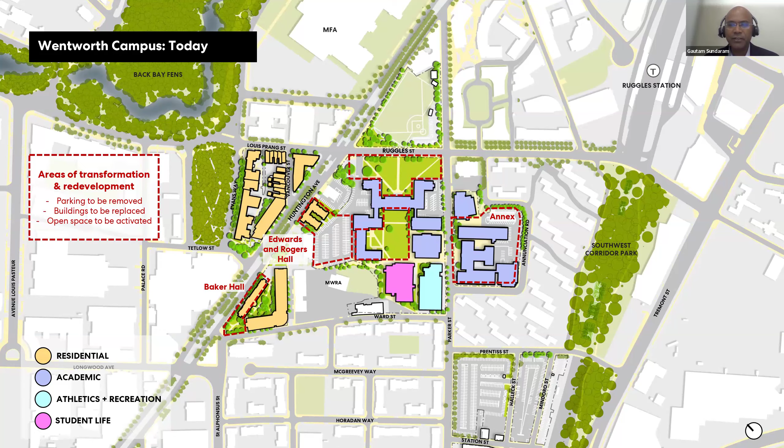But the key aspect of this plan has really been about that open space framework. It's about how do we really start to connect to what makes this place so unique, as we're organized by many of the neighborhoods that surround us, but also its amazing location.

How do we really connect that open space framework from the Fens to the Evansway Park and really make our open space framework part of that story and experience as it connects all the way out towards the Southwest Corridor. So really intentionally thinking about what those green spaces are, creating a diversity of those types of spaces.

What we're trying to highlight here is that this is not just about the student community or the Wentworth community. This is about the much broader community, engaging them and creating a series of diverse types of scaled spaces, but also diverse ways we program some of these spaces.

Some are passive recreation, some are larger gathering spaces, to a more park-like space, to a smaller social space, to a community garden scale space as well. So really thinking about the broader experience coming from the Fens all the way through our campus has been a key part of how we think about the scales and types of spaces and making that interconnected.

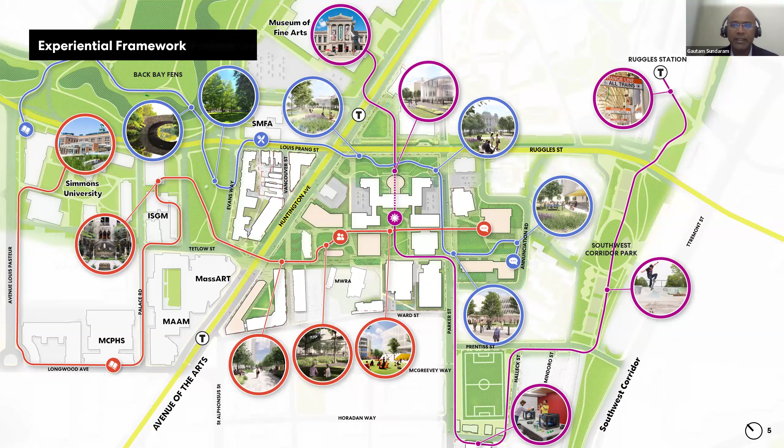Similarly, then you overlay that with a circulation pattern. And that circulation pattern is one that's really about not just creating direct connections, but a fluidity in experiences as well, creating those smaller moments of pause, whether you're in an indoor space or an outdoor space.

So how do you start to really create that circulation pattern that connects to the broader context and let that open space framework and circulation pattern drive, by putting the landscape in the forefront, what this overall master plan wants to be.

And so that has led us to the overall master plan. In the principles, it has been very consistent with what we shared with you before, but with a lot of differences in how the overall ground plane has evolved, with a significant open space called the Commons in the front with a new pavilion.

By relocating what was previously discussed as the pavilion, at the corner of Ruggles and Huntington, it's now going to be a gateway and a welcome center to the Wentworth campus itself.

And then starting to really create a series of open spaces, from the Fens, the Evansway Park, to the Triangle Park, and then creating new smaller spaces like the Grove, which are now framed by a new residential building on either side and an academic building. Then really reimagining the quad itself as the heart of that campus, and connecting all the way across Parker Street into what could be a new green space with a series of other garden spaces now transformed by the redevelopment of the annex site as well.

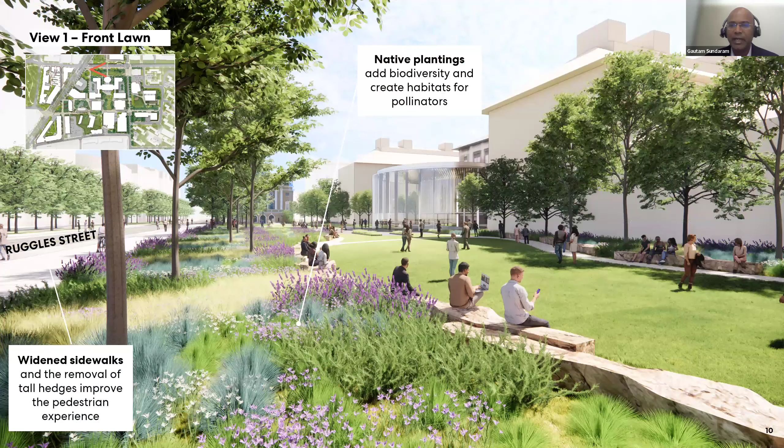When we look at the experience today, it's a very civic lawn that is much more of a visual element, separated by an overgrown hedge with narrow walkways and direct pathways leading to Wentworth Hall itself. We're transforming that to be much more of a park for the community and the neighborhood, unlike what we have today - a park that celebrates and brings in a lot more ecological biodiversity.

It creates a buffer between what is a vehicular street along Ruggles and what would be a programmable space, whether during the daytime and weekdays, or during nights and weekends, where it could be programmed for many uses for the community as well. Widening sidewalks with the removal of many of those hedges really completely transforms this into a much more usable and programmable park, one that promotes urban biodiversity.

As we continue to walk closer towards Wentworth Hall, one of the key challenges has been the inaccessibility of the building itself. So we're taking an impediment and transforming it by creating a new gateway to the campus, a place that really becomes a visitor center, a welcome center that opens up the campus and starts to make it a place of science on display, celebrating the great work that many of our students do.

By making it accessible, it starts to become this gallery space that celebrates the work our students do, but also is a great way to showcase and bring our visitors and community through this journey of classrooms, open spaces, and gallery spaces - bringing you from that front lawn all the way through accessible walkways into the heart of the campus, which is the quad.

So that's the quad as it stands today. That's Beatty Hall, an existing building. And then here are the lower one-to-two story buildings I was talking about before.

A key focus has been, while this is a great lawn that everybody appreciates, to transform the way we think about the edges and defining that. A new academic building, very similar in character to this existing CEIS building to my left, will have maker spaces at the ground floor with student co-working spaces, lounge spaces, and other meeting spaces at the upper level, with a cascading set of stairs as a way to define and activate the edges and activate our overall quad as well.

As you move through the Grove and look at the next very important threshold - if you're coming from the Fens or the Evansway Park and crossing Huntington Avenue, this is your current view right now. We're transforming that to be much more pedestrian-friendly, with a wider amenity zone lined with trees and lights, and a wider sidewalk.

Getting rid of the piers and the fences and opening up those green spaces really creates one comprehensive green space that could be programmed and serve many different types of activities, and also becomes a much more vibrant addition along Huntington Avenue as a civic space.

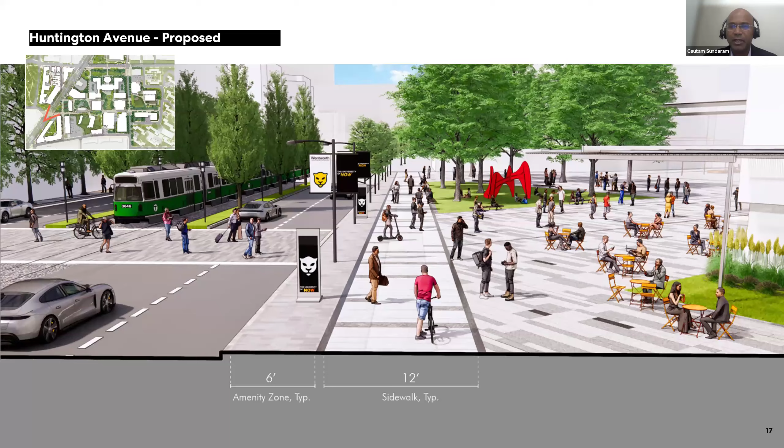As I make my way through what's currently known as the Treehouse building, walking what has also been called the Pike, you can see that narrow sidewalk beyond - that's the current view. We want to transform that by making it a much wider sidewalk, lined with planting on either side, completely opening up this connection in the east-west direction, a very strong pedestrian connection.

This really brings us all the way through into the core of the campus, but then also allows you to walk all the way out to the southwest corridor as well.

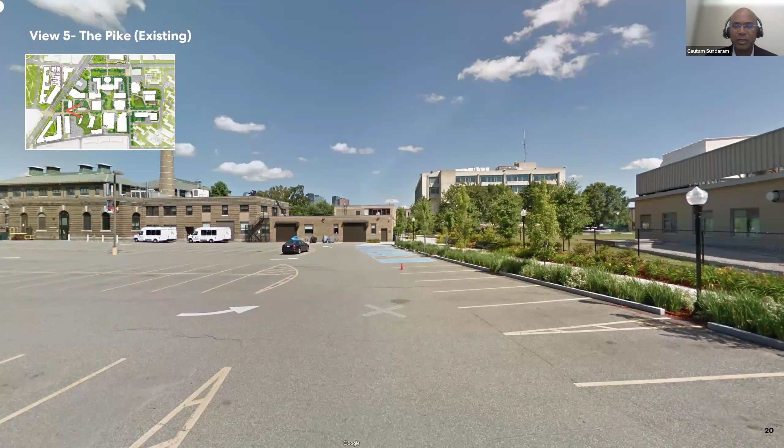A parking lot, currently called West Hall, is the major primary use here. You can see that narrow walkway separated between the parking lot and the MWRA site is now transformed into this wide pedestrian promenade, shaped and spatially defined by this residential building, creating a new green space where the parking lot exists right now, which we've called the Grove.

This allows us to have a lot of active uses at the ground floor, but also allows that fluidity of circulation with mural walls screening the MWRA site, creating covered and semi-covered spaces as well.

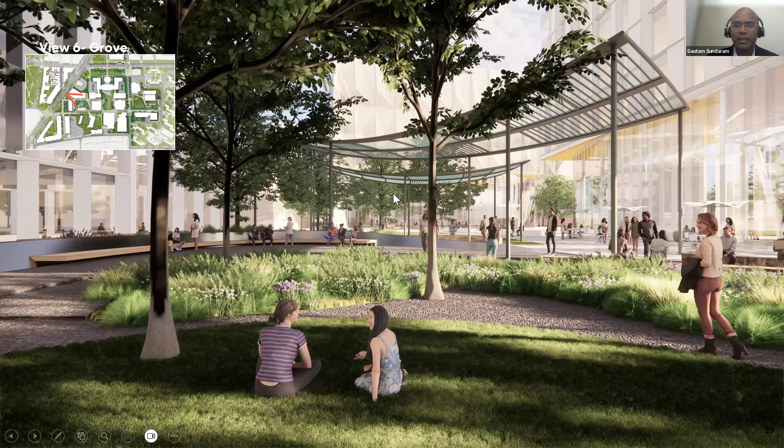The parking lot itself is now transformed into a new green space, which we've called the Grove, framed by many of these residential buildings with active ground floor uses, and also the academic building.

Not only a space for the Wentworth community during the daytime, but more of a passive space for social and smaller group gatherings under a canopy of trees, creating a shaded environment. At nighttime it becomes a space for the community as pedestrians come in off Huntington Avenue, engaging with this vibrant, sculptural space that brings art and other elements for programming during the weekends.

This also allows us to continue this strong pedestrian connection, making its way through these green spaces towards the southwest corridor. And finally, in conclusion, this is the view looking back from the Annunciation Road.

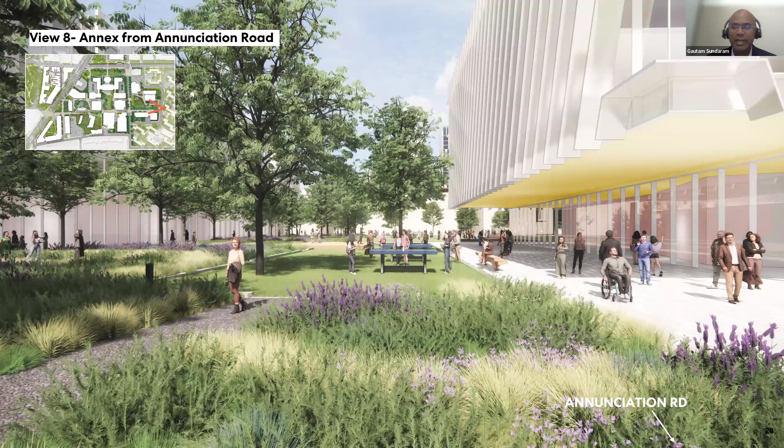From Alice Taylor Housing, a lot of what we see is the backs of building services and sidewalks. What we have heard from community members is transforming that view into something that's no longer the back of a building, but a new garden space framed by active buildings on both sides.

A garden space that could be programmed for seating and other ways the community could use it, while also continuing to be part of a larger framework.

This is an existing aerial view looking back from the Alice Taylor housing side, which now gets transformed into a series of open spaces that make a connection all the way from the Fens towards the southwest corridor.

The pike is now transformed not just as a singular idea of a walkway, but into an idea of multiple open spaces of diverse scale.

Really starting to change the way we think about land uses, no longer organizing them by primary uses, but really activating the ground floor as much as possible.

Here's showing you how we have more student life and active spaces at the ground floors of many of these buildings, highlighting the new pavilion, which is a major visitor center and a gateway into the campus.

Ultimately showing this in the overall massing as well. One key aspect highlighted about the height of the residential building is that we're meeting the Avenue of the Arts guidelines, and there's no longer a shadow cast at the Emerald Necklace for any moment of time in the entire year. So we've taken down the height of the residential tower.

This aerial view starts to show the overall composition of open spaces. Finally, I want to close on the impact of what we believe this master plan really reinforces: the legacy of the city of Boston, and how it could be a great addition in connecting the overall Emerald Necklace.

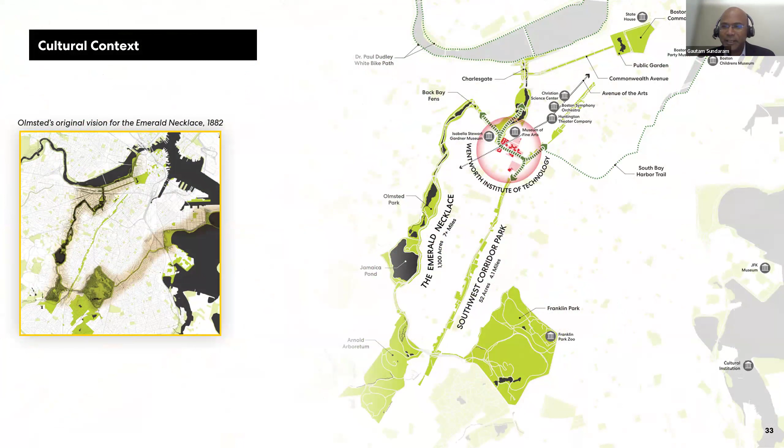Gautam, do you have a site plan that shows proposed and existing buildings together? I think all of the renderings were beautiful, and I just think looking at a site plan to tease apart what you have and what you're proposing would be really helpful.

Okay, I will go to the appendix. Sorry if I missed it. I did not share one next to each other. Okay, but I will absolutely put that together. Give me 5 seconds.

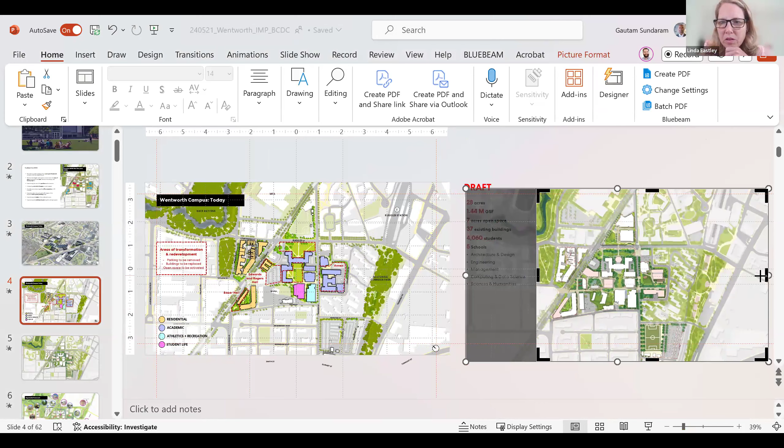So we have proposed on the right with the pink colored buildings being proposed. Here next to each other, I'll zoom in a little bit more. Here you can see the annex building has been replaced with a new green space. We're keeping Ira Allen building and then having these two academic buildings start to frame that green space, but also create this new space over here. As I continue, the main quad space stays the same, but we've made some landscape improvements to make it much more a series of micro spaces.

And then the replacement of what is... we've also replaced this L building with a new academic building that now completely defines that quad.

And then over here, which is the west parking lot, by replacing Edwards Rogers with this new residential building, which is the taller building you saw along Huntington Avenue. That's the existing treehouse. And then here we have a new residential building as well that is now defining this green space called the Grove.

It also allows for the pedestrian connection to be continuous all the way from Huntington towards the southwest corridor. Here, this shows the replacement of Baker Hall in its own place, but with a taller building massing at that corner that really starts to create much more of a presence along Huntington Avenue.

And then the last is this addition of the pavilion, which was previously proposed over here. At one point it was over here, then moved to this point, and then we felt this was a much more integrated way of organizing the program.

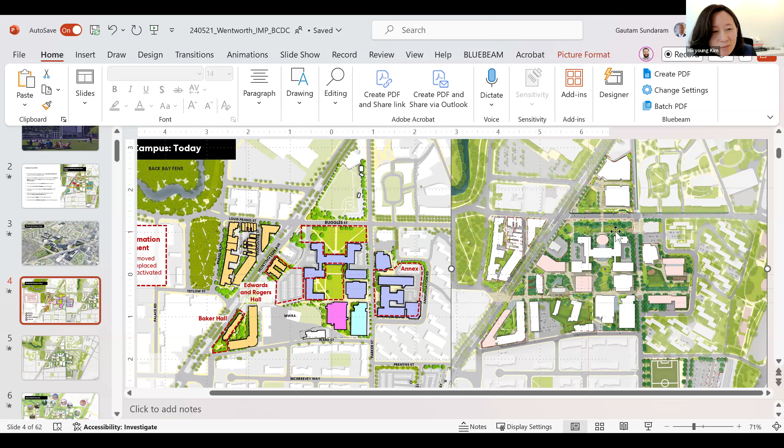Did I clarify your question, Linda? Yes, that was great, I was really looking for this slide, so I appreciate it. Could you now zoom into the proposed plan just a little bit more so we could really see? Thank you.

We spent a lot of time measuring out an existing tree inventory of the campus, and then looking at how we can not only add a lot more tree canopy, but also, by eliminating a lot of the parking circulation, how we start to introduce much more pervious paving, since we'll have a lot more pedestrian areas, to really increase tree canopy and create these transition spaces where building and landscape can engage more with each other. This is something that has been missing in the campus currently.

And I can continue tracking towards the east so you can see more detail. Imagining this to be a place where you could have outdoor classrooms with a pavilion, learning spaces, and a more intimate community garden type space. The other aspect is we've also integrated many rainwater gardens as part of the overall campus.

And you've seen certain highlights of those in the ground plane views. But the idea here was to evoke the historic Stony Brook that used to run through at one point, and to create a much more modern way of interpreting a greenway with a hydrology system that goes along the pipe as well, so to be more intentional about bringing back some of the historic elements.

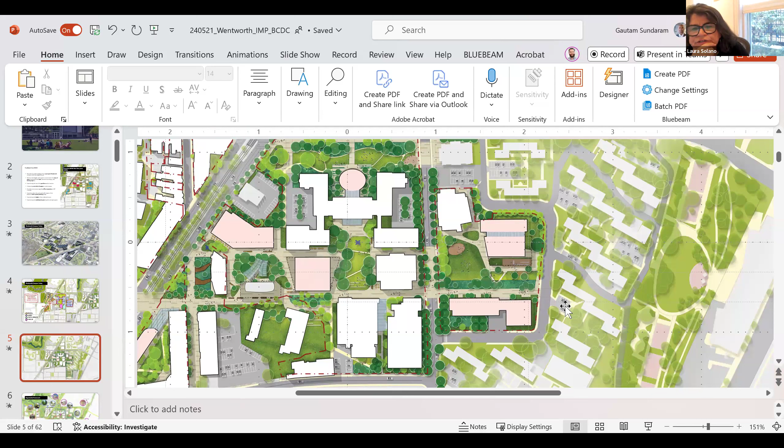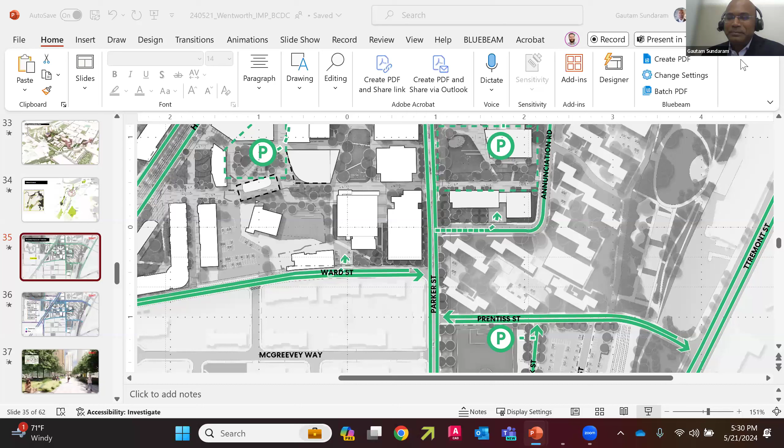Thank you. Dave should feel free to correct me. Could you talk about how the vehicular circulation is going to work, both for parking areas as well as servicing? I'm really glad you asked this, because that allows me to bring up a slide from our appendix. One of the key aspects has been to eliminate vehicular circulation from the core of the campus.

One item that was debated, and we received feedback on, is that we used to have a proposed parking garage at one point. We're no longer having a proposed above-grade parking garage; we now have below-grade parking, located below this green space here, and then this green space over here.

For the existing access to that parking garage, we currently have an existing curb cut for this parking lot here where we get to. We'll either come off of that, or we will come off of Huntington Avenue. These are being advanced in design and discussed for their overall impacts. We don't exactly know which one we will go with, but VHB is exploring those ideas.

Similarly, the parking access for this parking level below the green space would be off of Annunciation Road as well, taking the parking access off the main streets and Parker, making that as pedestrian friendly as possible. So here you can see highlighted are the parking levels below.

This lot comes off of Huntington. So that is off of Huntington. That is currently the fire station, and Wentworth does not own that. So that access is off of Huntington. That is correct.

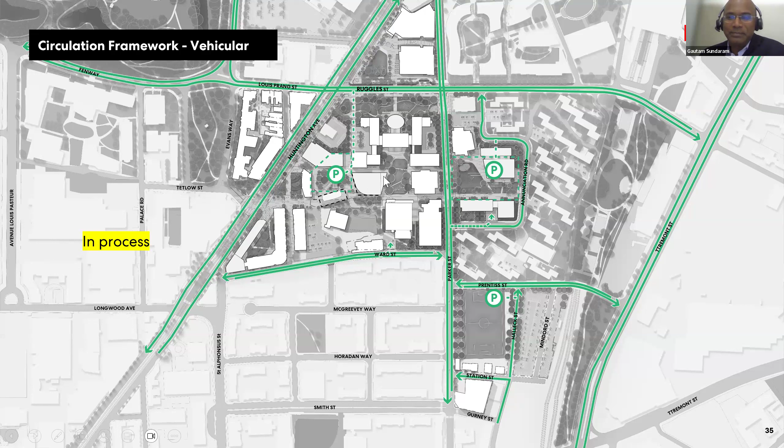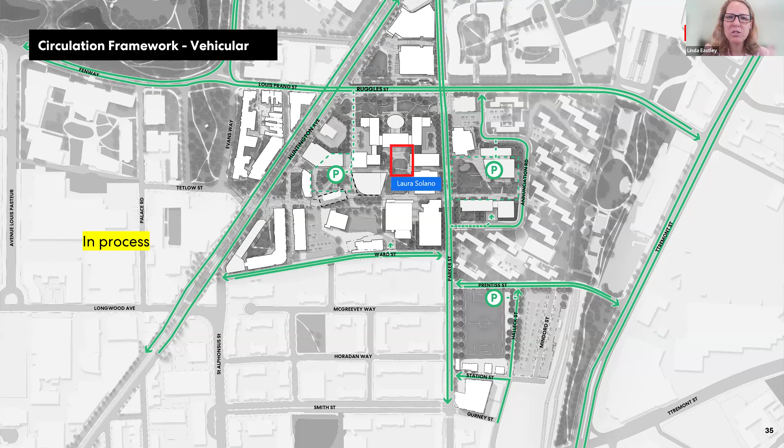I had one suggestion, maybe for the commissioners here. So Gautam, because it's been about a year since we've seen this, and there have been some changes in those 11-ish months, this has been super helpful for you to dive into more detail with us, because it's certainly refreshing my memory, and maybe others too.

What we often do is begin to look at these larger IMP projects by system. So doing a subcommittee focused on the open space framework, thinking about pedestrian circulation, and how the site design concepts and principles tie into that larger open space diagram that you shared, this one, and also the other diagram you shared. And then perhaps also doing a subcommittee focusing more on building massing and the relationship to the neighborhood, the context.

I wonder how the commissioners feel about going forward and doing something like that. I think there's just so much to talk about here, and today was so helpful for me to get reminded of some of the principles and goals that you have as an institution. What are other thoughts? I agree with that. I think there's been a lot of work that you've done on this, so we really appreciate that for sure.

I think there's some really strong pedestrian moves that I can see in the plan. But it does feel like I need, and I don't know if other people feel this way, for you to give us some drawings where you pull it back a little bit, where we get some figure-ground drawings or things like that, because I'm trying to understand the exact design of the pathways and what it is you're creating here in terms of garden rooms versus quads versus other spaces, and a diagram that can bring us along to understand a little better. There's a level of detail here that makes it a little hard for me to see what's the overall concept tying this vision plan together. I think it would be great to pull this apart.

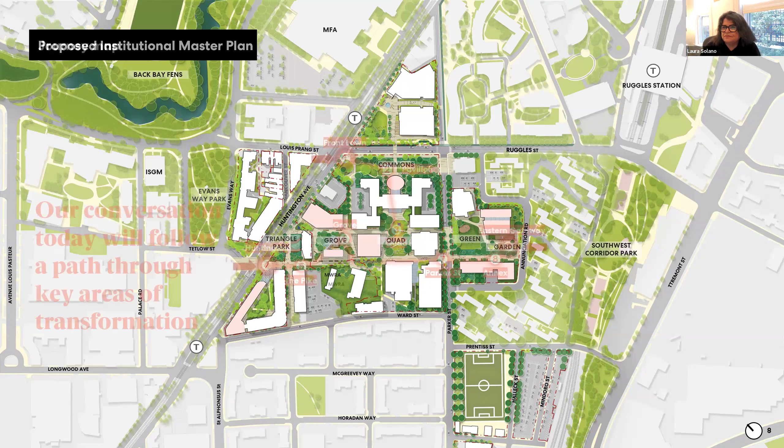One of the things that I think would be helpful, and it's going to sound like detailed information, is for all of the different green spaces you're making, where do you enter buildings? Even just a dot showing where doors are would help understand how some of these spaces might function. I know you have the diagram showing connectivity between existing green spaces on and off campus, and that was really helpful. But it would also help to hear what you envision happening in the Commons, the Quad, the Grove, the Triangle Park, the Green, the Garden - lovely names, but what do you really see happening there? I'm not talking explicit program as much as active, passive, or both - dining, meeting, some basic ideas about that would be great.

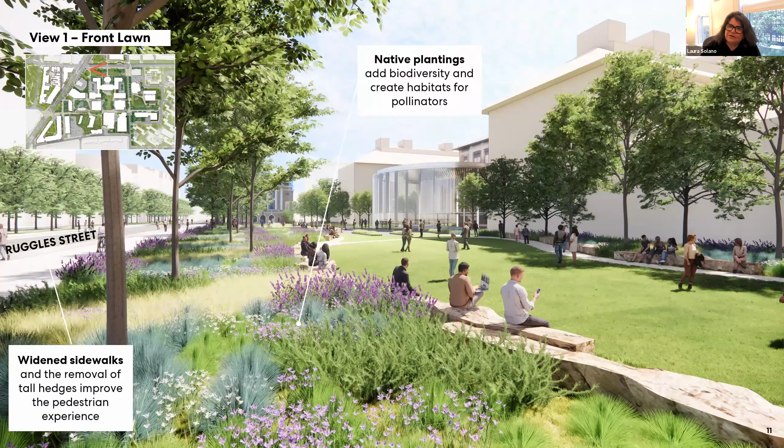Modern campuses aren't axial, they're not Beaux-Arts, they're much more fluid. So I'd like to understand that as well.

But wow, have you put a lot of information and thinking into this? It's only because of that that we're able to comment so much. I think we're all eager to dig in. There are many questions I could answer today, but I'll table this for a much more organized conversation, because all the questions you're bringing up about access, location, what are the fronts of buildings, how are these spaces all different - we've had thought about all of those, and I don't want to short-answer them, but we do have thinking behind all of those aspects.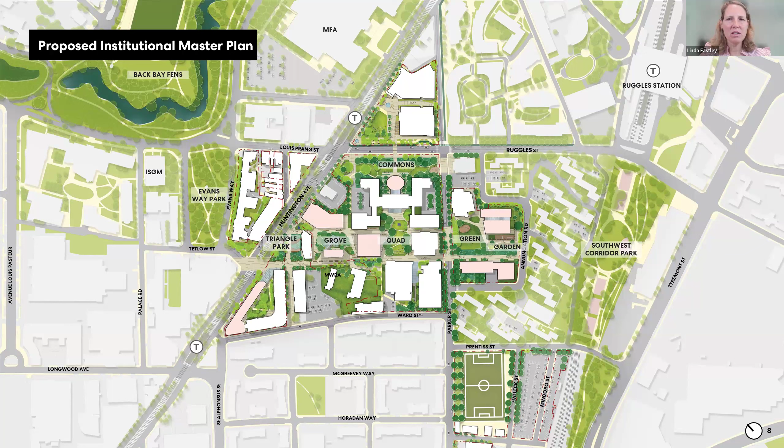Great. Jonathan and Bill, any comments for Gautam and the team? Things you'd like to see in future subcommittees?

Yeah, I'm happy to start. I'll kind of piggyback on something McYoung said - really understanding what is the big idea clearly. I'll also echo that it's been a while, and this is the first time I've seen this. So just understanding what is the big idea, and then how are these other moves in service of that, just to clarify and create structure to get our heads into this - otherwise we can go a little willy-nilly, all over the place. So being able to have something that organizes how this all works would help us understand your intent.

Thanks, Jonathan. I think Bill might have had to take a call. But Gautam, do you feel like you have enough to go on, and that organizing some of these questions into themes will help us catch up a bit?

Yeah, I think organizing them by themes will help the conversation be more focused, so we don't get lost in a lot of information. We'll try to bring some structure - first focus on the urban design, as Linda said, since we've done all this. What are the big ideas? We have some big ideas on the urban design diagrams, and then how the massing starts to shape it. We'll walk you through that journey of thinking too. We appreciate all the hard work you've put into this. We're looking at - I'm sure you already have a lot of these diagrams we're requesting. Looking forward to a lively conversation as we move forward.

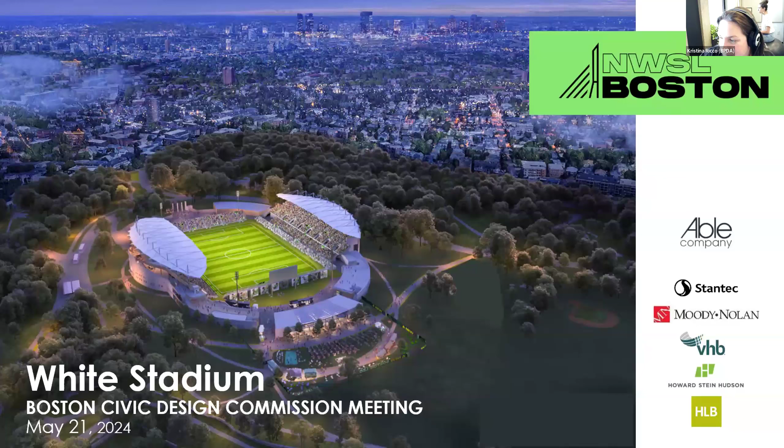Thank you so much for taking your time to volunteer your services to the city of Boston and reviewing this project. I do want to share that this project was reviewed at the full commission meeting at the beginning of this month, and this has been part of a really robust community process. There have been numerous meetings, which I'm sure Tamara can list the number, but I do want to share that there's been a lot of focus recently on a series of design workshops that have been taking in community feedback along the way to advance the design in a way that reflects that input.

So we had our first design meeting back in April 25th, conducted our second meeting May 8th, where we focused on program elements of the project. And we're looking forward to our final design meeting, which is coming up on May 30th. There also continue to be numerous meetings held related to transportation, as well as IAG meetings that are going to be focusing on community benefits coming up in June. So this has gone through a really robust community process, and we're delighted to report back to you on some additional detail today. With that, I'll hand it over to Tamara and the Stantec team.

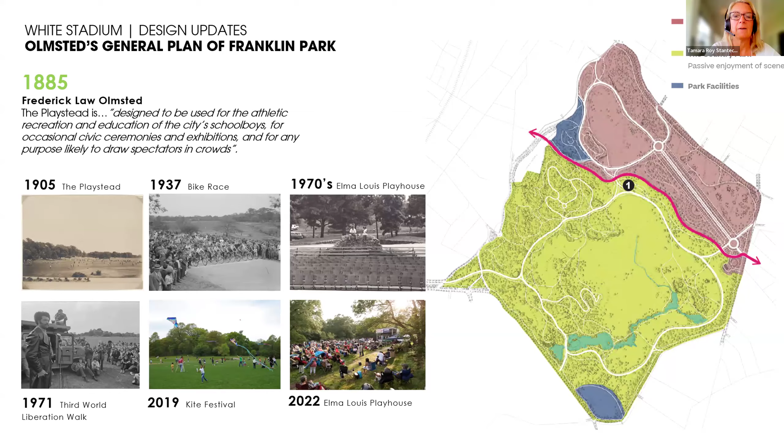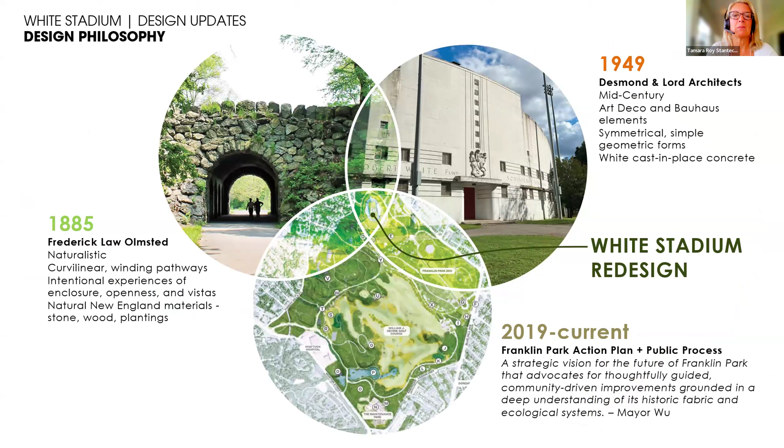Our team has come up with this language that tries to bridge Bauhaus, Deco, and Olmsted, in soft lines, in color, in warmth. We'll talk about that a little bit more.

In addition to that, we have this wonderful space called the Grove, which really doesn't exist there currently, and is this small to medium scaled space compared to the stadium scale, which we've discussed with the community as a real place for a whole bunch of flexible programming. Because there's food and beverage there, which has never existed in this part of the park, the potential is there to really create a new place as well as renovating an old place.

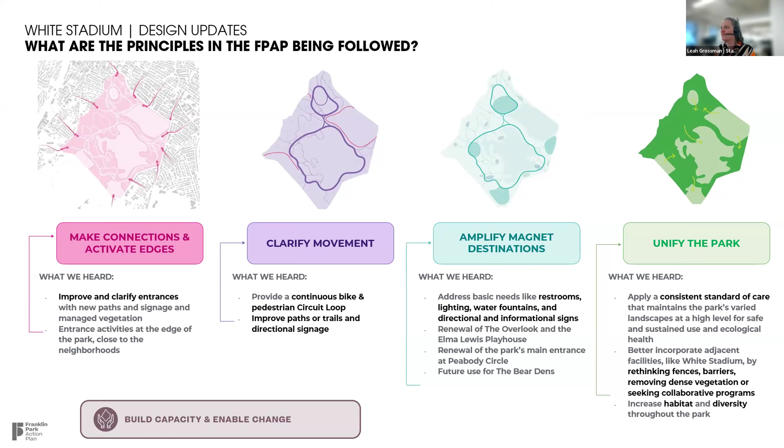I'm going to talk about two of these more specifically related to circulation. The first one is showing you the primary loop. These are clips right from the Franklin Park Action Plan, which really supports our goal of removing vehicles, keeping this for the majority of the time as a bike and ped loop.

Hey Leah. Kristina just texted me that we only have 10 minutes for this entire presentation, so I guess we're going to skip through this and just say that there's a lot of detail in the Franklin Park Action Plan that we are following, much of which is not within our scope of work.

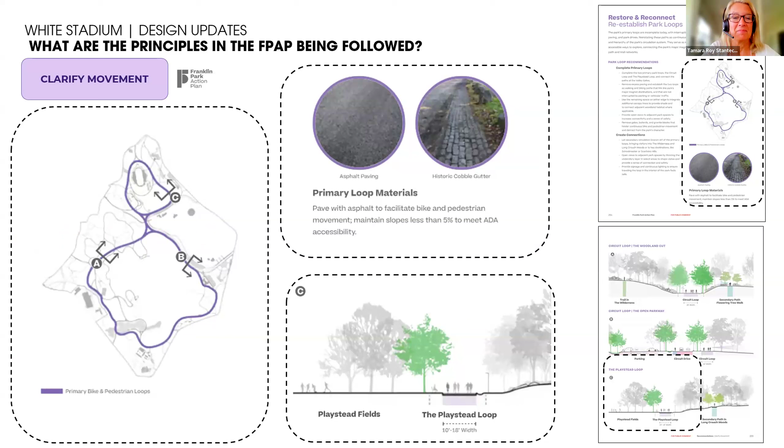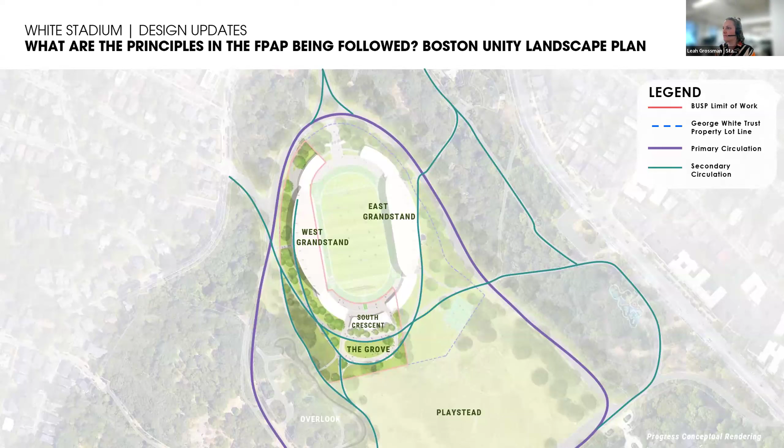Asphalt paths are about 18 feet wide on the primary path, and about 12 feet wide on the secondary paths. This shows a combination of existing paths and how some of our new paths will align with those.

Zooming in to the Grove, this is the area Tamara was talking about. This area will have flexible lawn space usable every day, but also a couple tiers and ways it can be restricted so you can have ticketed events, community events, markets, and lots of exciting things.

Now we're going to show you a few of the ways you approach the stadium in the proposed design, starting from the north. We're going to show a little bit of design that's not within our scope, but we wanted to be responsive to comments.

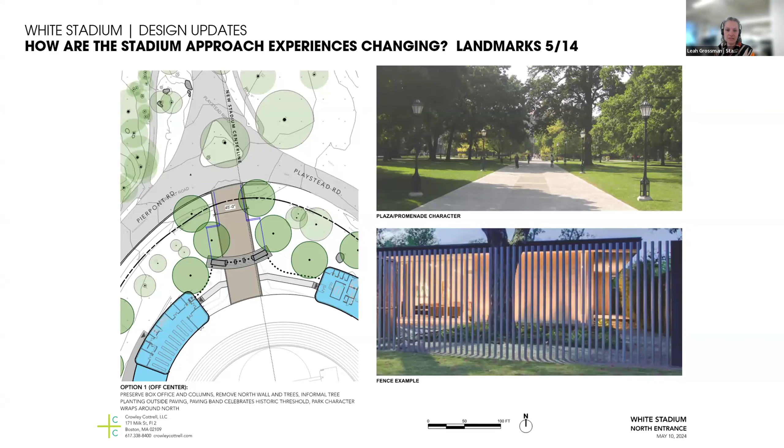We're going to provide a walkthrough of this process, walking up the path and bringing you into the stadium. So I'll shift to that.

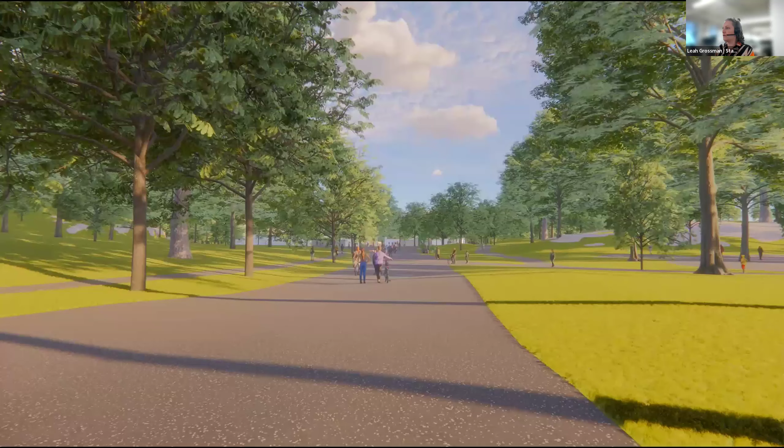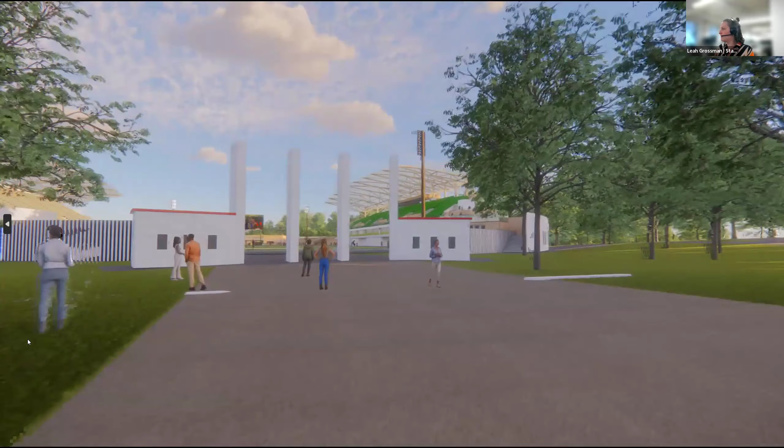The path here is the existing path, with a lot of mature historic trees that will be preserved. As we get closer, you can start to see the new stadium appear. Apologies for the glitchy connection. Then we come around and start to see the West Grandstand and the new canopy, and you'll walk through this entry plaza through the historic pillars as the stadium unfolds. This is shown on a daily basis where folks will be able to use the track and field for exercise on a nice day like today.

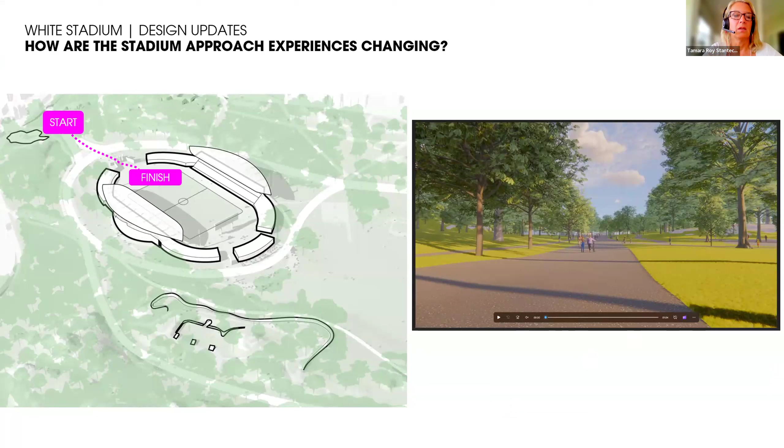I promised Liza from the Parks Department that we would mention there's a lot of work going on outside of our scope, in conversations with the East Landscape team and Reed Hilderbrand, about improvements to these paved areas and gateways to the park. But that's all outside our scope, and it's also still evolving, so it's not quite ready for prime time.

For that one we did not do a video because we have one coming up later when we're talking about the stadium architecture of the West Grandstand. So next, we're going to be looking at it from the overlook.

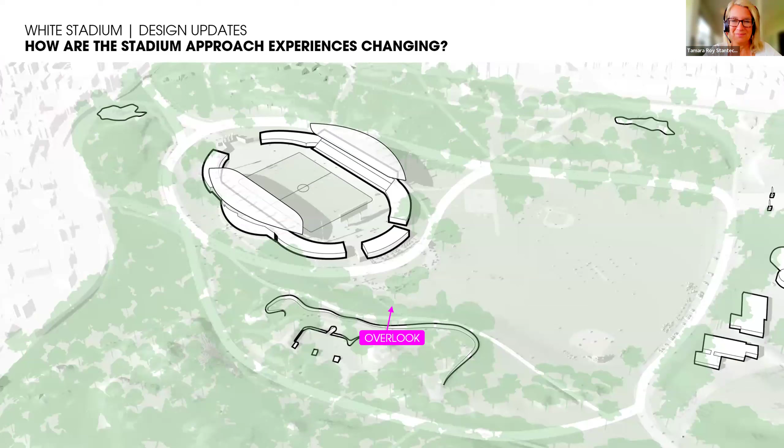We're going to take you on a little tour of the overlook, starting on the south and walking north. We know there's an existing project to renovate the overlook and the Elma Lewis Playhouse, and we're not suggesting anything there. We're just showing the existing conditions.

As you walk around the south, the wide views of the Playstead remain as they are today, and then you start to get glimpses of the stadium through the trees, and you start to see the activity of the Grove unfold.

We are also working with parks to design the paths that will connect to the overlook. We know it's an ongoing design, so those paths are a little tentative at the moment because we want to make sure they align to the future designs for the overlook.

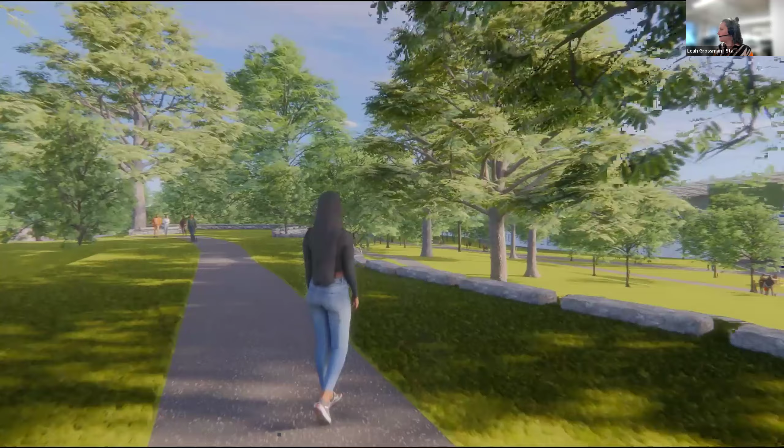At this point, we're about to walk over the tunnel and look back over the new Grove design and the stadium. Then at the end, we turn back and look over the Playstead to show that through this project, we're really giving a lot back to this Playstead. We're taking down invasive, covered chain link fences and opening up views and providing amenities for folks who use the Playstead every day for sporting events and the like.

Thanks, Leah. Okay, let's keep going.

So this last one we showed last time. I'm not sure if we should take the time to go through it right now, it's about a minute long. Please raise your hand if you haven't seen it. Commissioners, you have not seen it? I think we have several, Tamara, that weren't at the monthly meetings. So okay, let's do it then. It would be useful, let's do it.

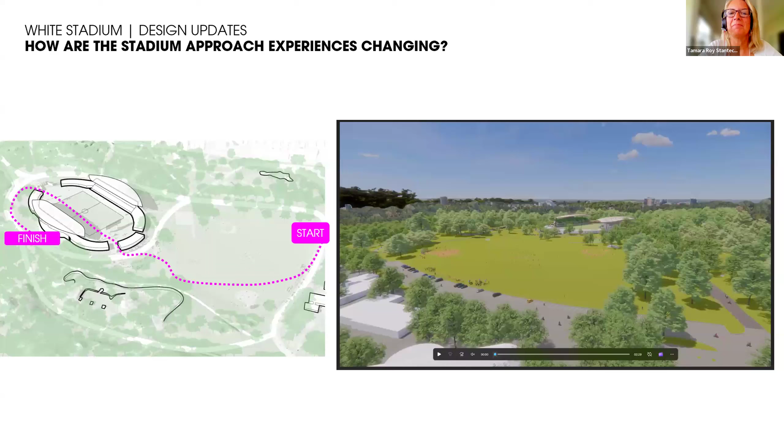So this one was really in response to community questions about how it would feel from the parking lot near the zoo and the overall Playstead.

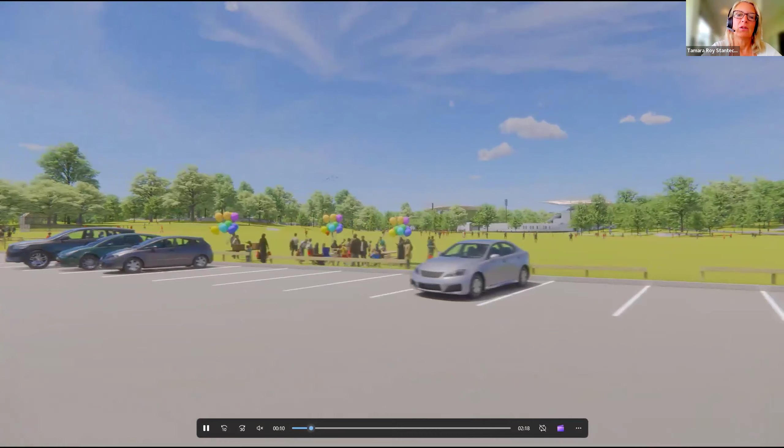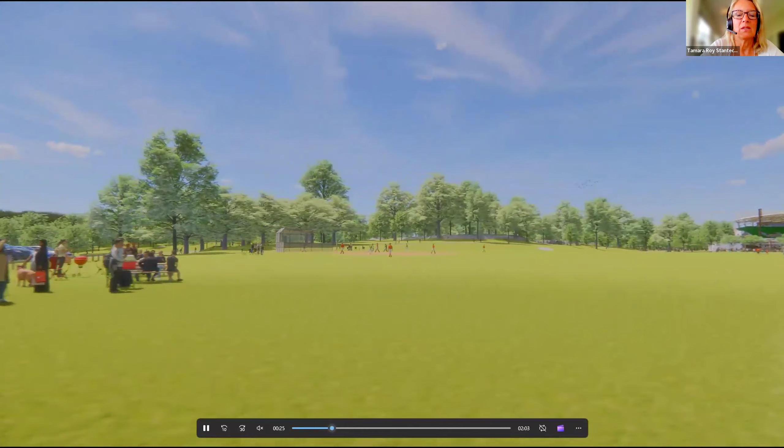So when you look above, you see the stadium and the landscape, but when you're here, you're seeing more of the daily birthday parties and gatherings of the community, barbecues. There's the baseball games, there's the overlook in the distance. You can see the soft rolling hills of Olmsted creating this valley.

Then we're looking a bit toward the right, just walking through, imagining it's a beautiful day and you're bringing your blanket and your headphones, sitting there listening to music or hanging out with your friends. We actually did a poll at our last public meeting and all sorts of great ideas came up for this space from the community, including just hanging out, movie nights, storytelling, yoga, Tai Chi, dance nights—all of these things that could happen here.

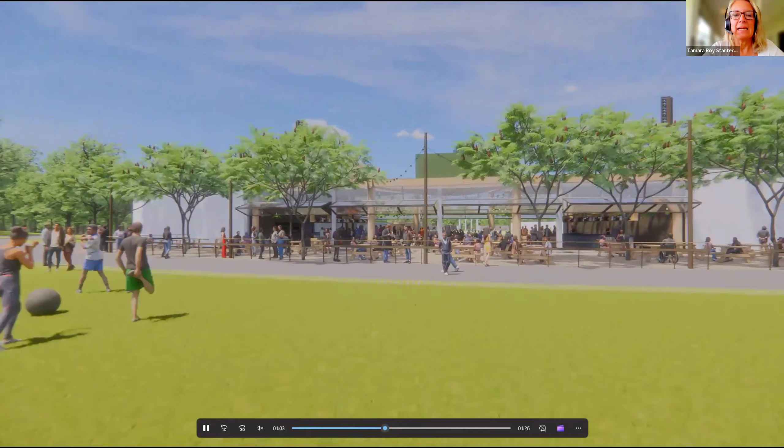Now you're looking at the South Crescent, and the design is that on nice days it opens on both sides and creates this axial view through, and it has a glass roof.

As you pivot around, you see the overlook in the distance and the wide open sense of the Playstead. We have a drink rail area here in front of the South Crescent, which consolidates that area. We have a team store, and we have food and beverage, as I mentioned.

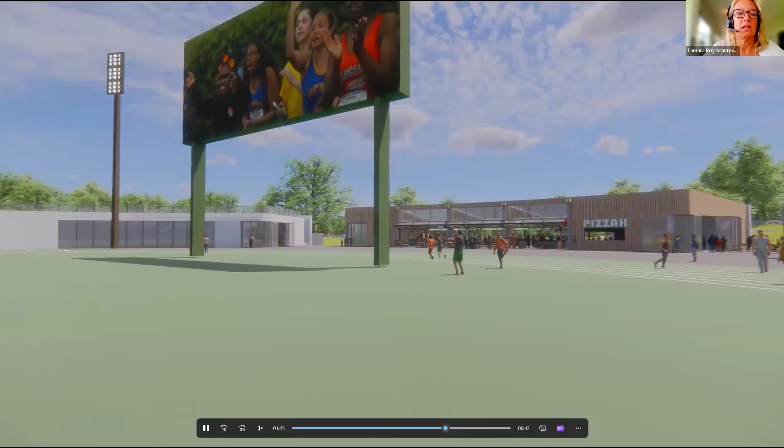From inside the stadium, you can see again that incredible view through, much more porous than what's there now, which is just a big solid white wall running around that end. You can see the scoreboard—we've actually shifted it north a bit more so that it's less visible from the playstead. It's only one-sided, so all the digital information faces away from the playstead, not toward.

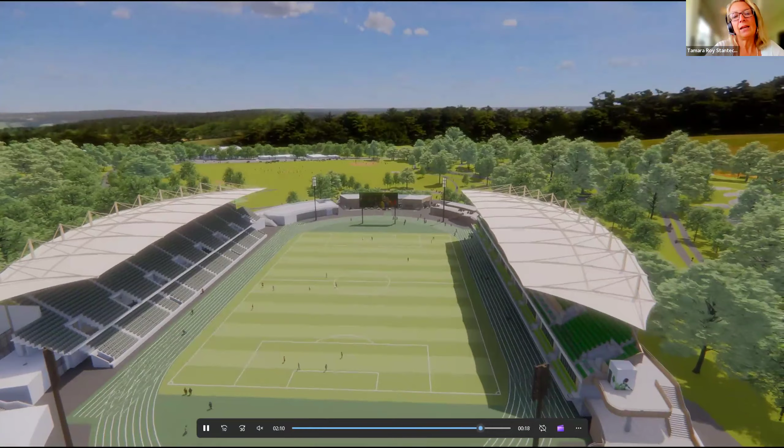Then as we fly up like a bird, you can see the canopies, which provide light shielding at night to the night sky, weather protection, as well as noise containment from the crowd noise. It's one of the very few things we can do that contains crowd noise.

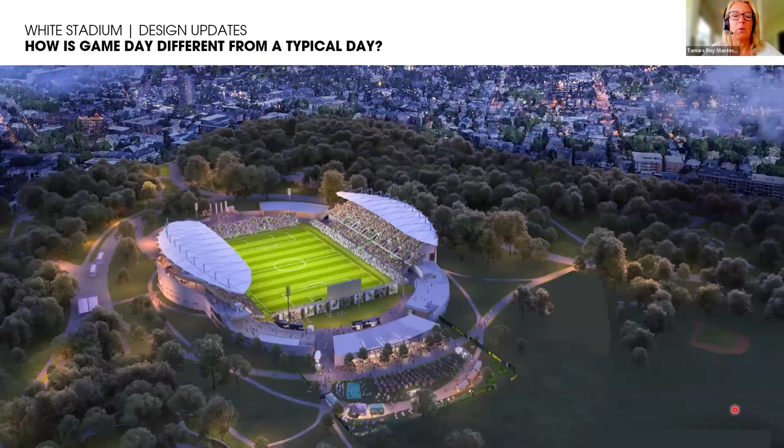And then you're coming around toward the West Grandstand. This area of paving is in the works, again outside our limit of work, but is being improved by the other team. Here you see the West Grandstand with the new canopy, which we're going to talk about next. So I'm going to move to the second part, which is how's game day?

There's so much to cover. I hope it's okay, it's 6:10. Shall I keep going? Yes, okay, do.

So game day, you can see here in this image. There are 20 games a year, often in the late afternoon or evening on Saturdays, with occasional Wednesday night games as well.

Otherwise, the playstead and park are just typical use by Boston Public Schools and the public. But when it is in game day mode, the Grove becomes a private ticketed area that's secure. That's because it provides a kind of gathering space that, if you went to Gillette Stadium, would be the parking lot—it's the pre and post game area.

What it does is spread out some of our transportation and access issues over longer times. So whether you get there earlier or stay a little later, that's what this is doing, along with creating a great space for activities for kids, music, and all that excitement.

Next—I was going to say we do have more transportation plans showing the difference between a typical day and game day, but I didn't want to turn this meeting into talking about that. So let's set those aside and just talk overall about the difference between game day and a regular day. Back to the West Grandstand architecture.

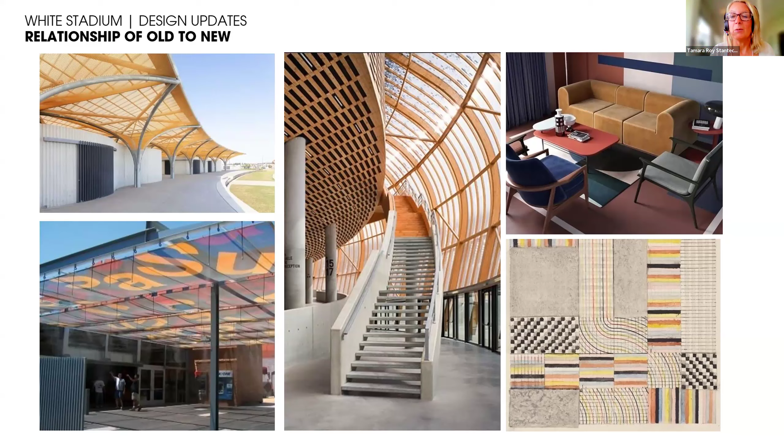We're also looking at media and how these canopies and other elements take on light at night, because it's a very nighttime kind of experience for the soccer partners.

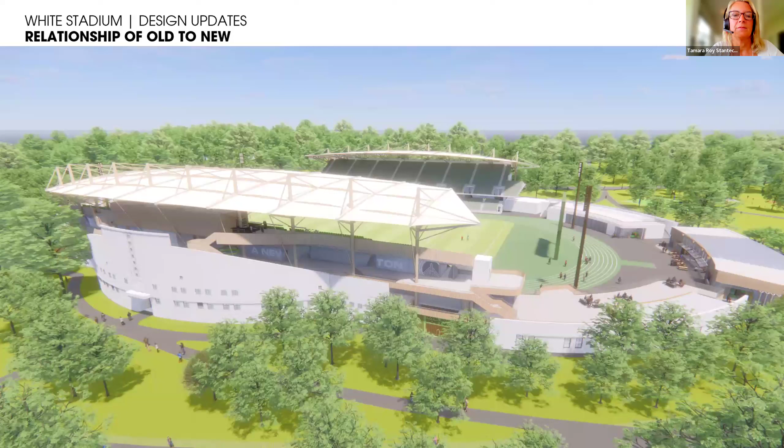Next—this is a view of our three-dimensional model where you can see the play of the white walls and the additional wings we've added to take on that extra program, which is shared between Boston Public Schools and us in different wings. And then there's that interspersing of ribbons of wooden rails and stairs and curvilinear grandstand edges.

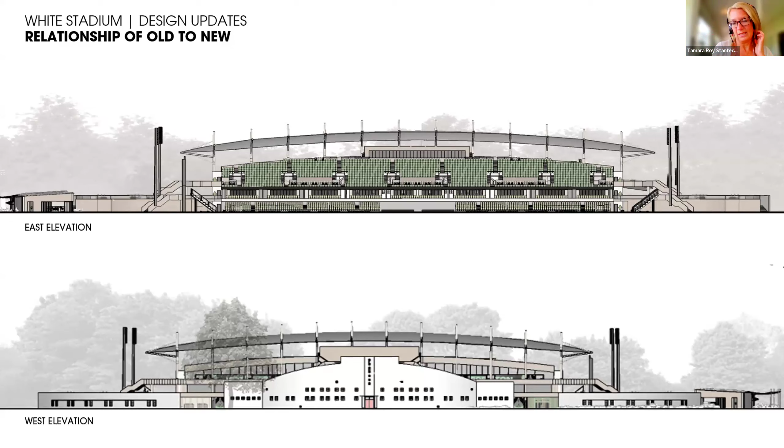Next—we were asked to provide some elevations for clarity and proportion. You can see on the bottom the west elevation, and on top the east. We're playing off one and the other, but also trying to set back the new from the old, which is why the elevations don't tell the whole story—they look like they're right on top of each other, but they aren't.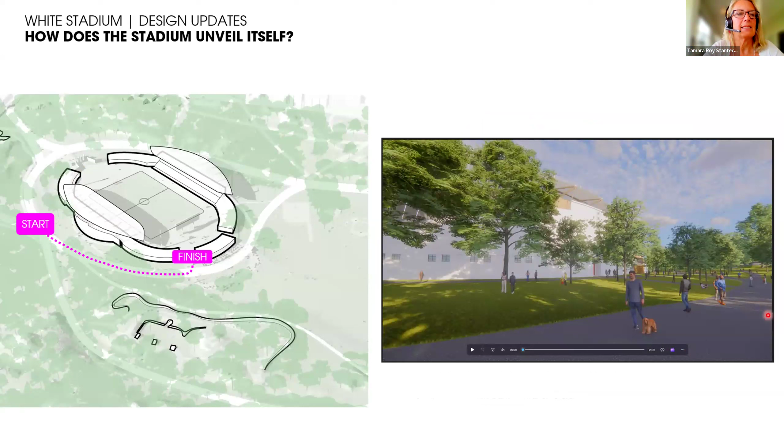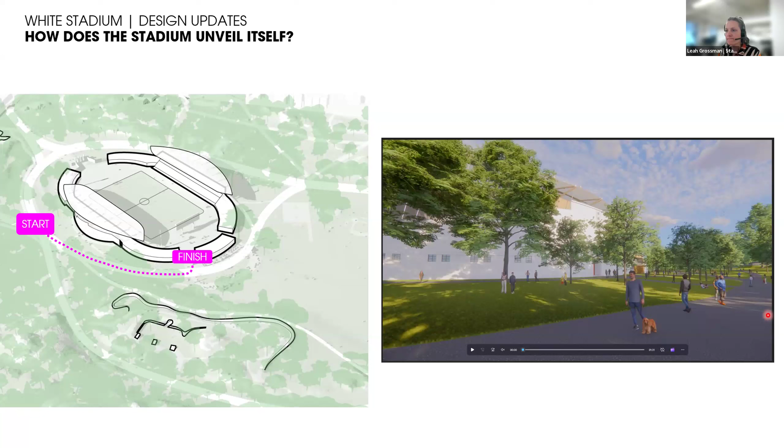All right, so here is our last animation. How does it sort of unveil itself? Again, we're looking at this late in the afternoon, early evening. All right, just pulling up this last one. We're going to come around and end at the entrance right next to the South Crescent.

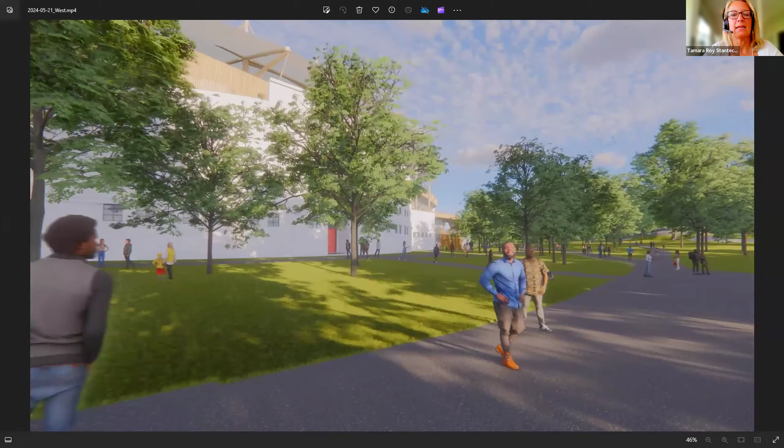As we said, the paving area, which is existing and which we're showing, will get revised so that it's much less paving. Part of the goal of the Franklin Park Action Plan is to reduce the amount of paving in the park. Some of these trees here are heritage trees, but many of them are also new trees, and we're in the process of trying to develop that succession planning.

And we're just walking to the south. You can see the overlook in the background. We're looking again at the clamshell wall and how the things we're doing sit behind it. Then we're passing the entrance on the left, that's the team entrance that all the women's team will come running in and running out at the beginning and end of the game. Again, more overlook to the left.

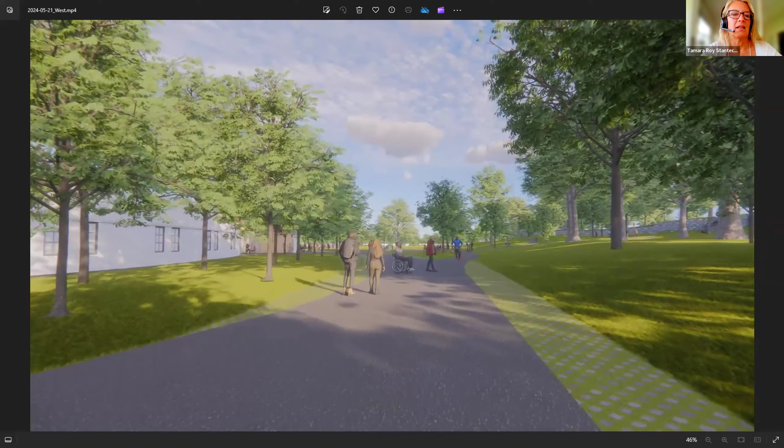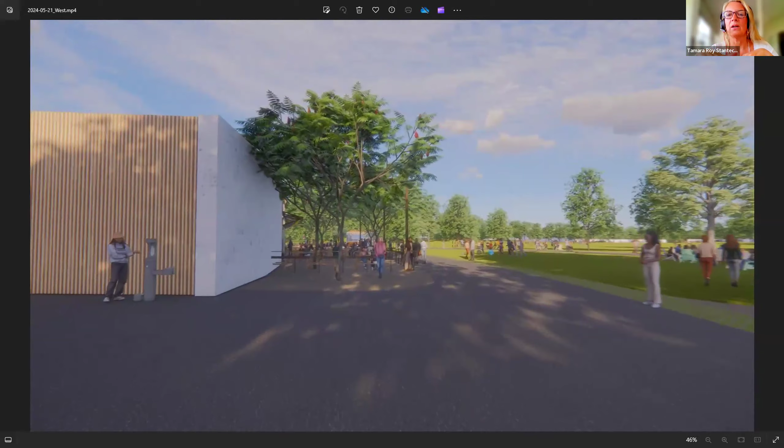And here now you see the wing, the southwest wing, where we are repeating some of those elements from the West clamshell, the window types and that Art Deco little cornice that's there. We kept the height down as low as we possibly could so that the views from the overlook you saw earlier would be able to go right over it and into the stadium. And then this is another view of that last stadium entrance.

So I think that is it. I can just leave this slide up for questions, or flip through. Right. So, thank you very much.

Thank you, Tamara. One thing I do want to note for the commissioners is that we did hear from you all that you wanted to see a little bit more of the East Grandstand as well. That architecture team continues to do that work and wasn't ready for this subcommittee, but we hope to be able to bring that to you at a later point.

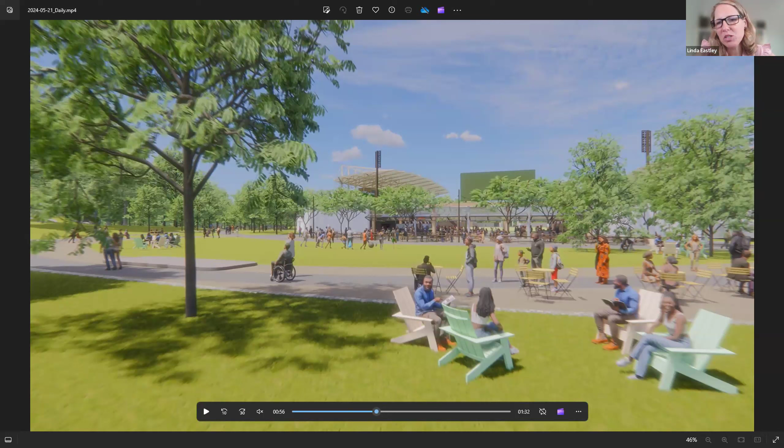So I'm curious, if I asked the question back, would you really want it called out as a special space, or is it okay that it gets a little invisible when there aren't big activities there? This image is a good one to ask that question with, because it feels like a visual foyer, but it doesn't have a lot of vertical elements that call it out as a space shaped by vegetation, architecture, or other things. I wonder in the off season whether it will feel just like another lawn panel.

Oh, sorry Bill, keep going, sorry.

So just something to think about, and I'd love to get other commissioner comments on that topic, or others. Thanks.

Bill, would you like to go next? No, thank you. Okay, okay.

So I think there's a missed opportunity here, which is that one of the most masterful things about Olmsted's designs is topography. If you look at the big gestures in Franklin Park related to the playstead, and how one space vertically goes into the other, I think Linda is picking up on something, which is yes, there's the notion of having a very light touch, as you've done in this photograph. But when I think about how this building wants to be better integrated into the language of Franklin Park...

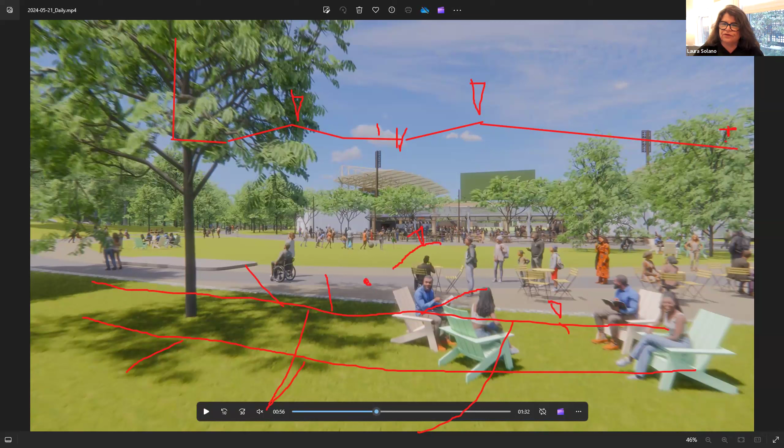I think just straight flat views in have no grace about them. So I'll leave it at that. I know others have their hand up, but I really think you should think about the long section line from here back into the park.

So I'll leave it at that for the moment. Thank you. I hope someone got a screenshot of that.

I'd like to give Leah a moment to respond, since we've been working a bit on berms before. Yeah, definitely, that's something we thought about in some of our early designs. When we had a redesign moment working with Reed Hildebrand, and gathered the action plan principles, one of the big guiding things was creating this open view and blending the playstead with a nice, elegant meeting to the stadium. So the idea of interrupting it with topography counteracted that continuity. But I do hear you on integrating some subtle topography changes.

It's hard to see from the model, but to the left on this screen is the overlook. When they actually built the stadium in the 40s, they created really sharp topography and cut off some of Olmsted's sweeping gradual changes. So on the left side, we will be softening that edge and blending the topography from the overlook back into the Grove area. But it's a good idea about cutting that long section and seeing how topography could subtly impact these views. That's definitely something we can consider.

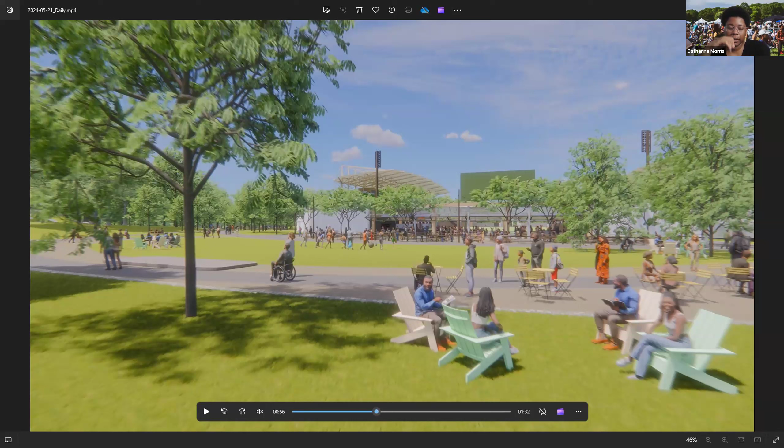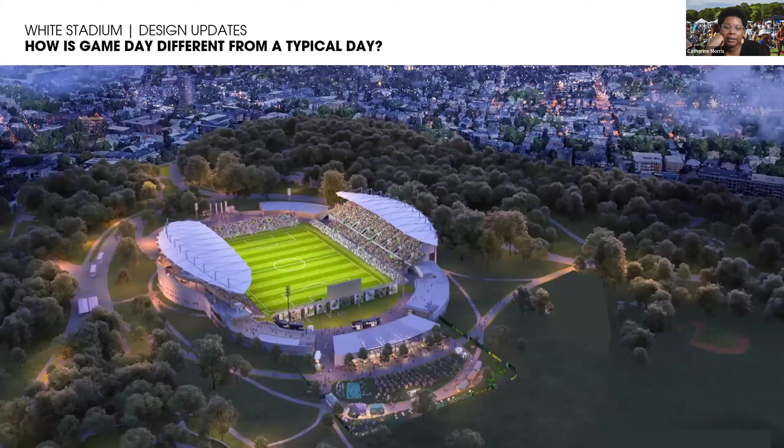Thank you. Can you all go to the bird's eye view that overlooks the crescent and the grove, if possible? I do appreciate Commissioner Solano and Commissioner Easley raising the flatness that's existing right now in that area. There's a lot of paths, and the thing that keeps coming up for me is transportation—how people discover those paths, how they connect to them, is a real concern for me. But I'm curious, given the current condition of White Stadium and that back half where shot put, discus, and other track and field events happen, and given this new take on it, what is the estimated square footage now of that area that extends into Playstead Field, if you have that number?

Our lease area is about 60,000 square feet right there, I believe. But once we put the South Crescent in, it's less, Catherine. So we could follow up with the actual number. Okay, and what is it like currently as is—what is the current square footage of that area back there? The one that's fenced in, you're talking about? Yeah, that is 60,000 square feet, I believe, and please correct me, one of my team members, if I'm wrong. I think that's roughly accurate.

Yeah, that is correct. So maybe we can bring this back for you, Commissioner Morris—the current fence line follows that existing yellow dash line. That's currently where the fencing is today, and the area behind it has some of that zone where discus and other events are being thrown today.

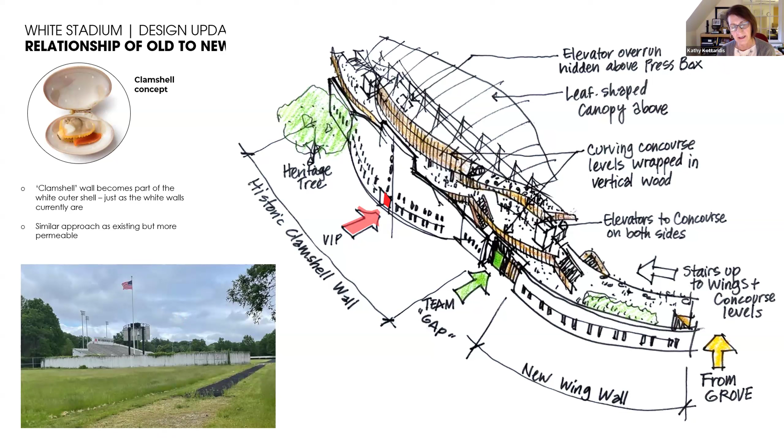I'm interested a little in—I understand we have two segments of landscape here, one that the school department is responsible for, one grandstand and a portion of the landscape. I'm curious what the maintenance plan actually is. Who's responsible, ultimately, for making sure a singular entity manages all of this in the same fashion? That wasn't clear to me in the way this has been presented as two segments, or two responsible parties for the development.

I do think this is going to be a great amenity for the neighborhood, and for the majority of the time for school department activities and recreational purposes. But I'm unclear which portions of the West Grandstand and the other infrastructure—team store and things like that—will be open and available, and at what times. Will all of that be closed-up space when there isn't a team game, or are there other uses for those spaces that continue to engage the community in the off season, or when the professional team isn't playing?

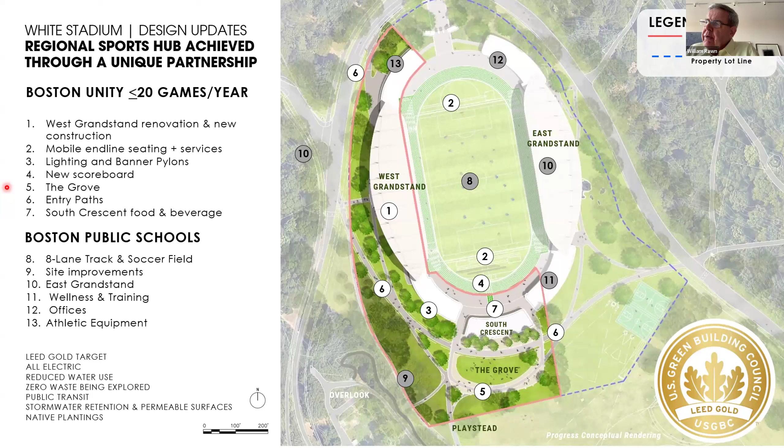So the question I have is how are you going to balance the issue of it being a stadium with seating on all four sides with its sense of community openness? You may not have answers to that, but that's the issue to me that is pretty challenging. Maybe tomorrow you have a two-minute answer to that question. I don't know.